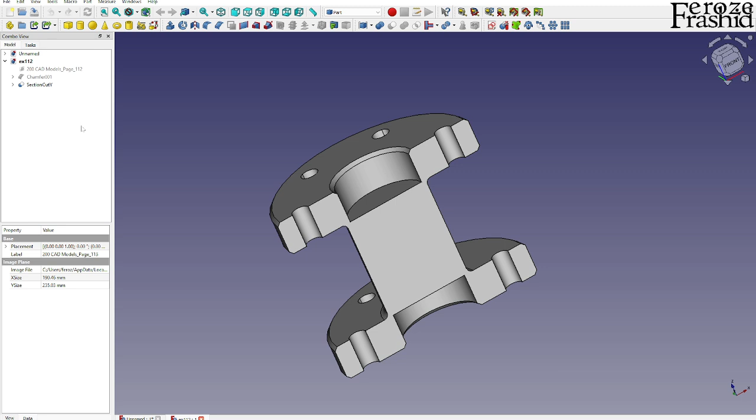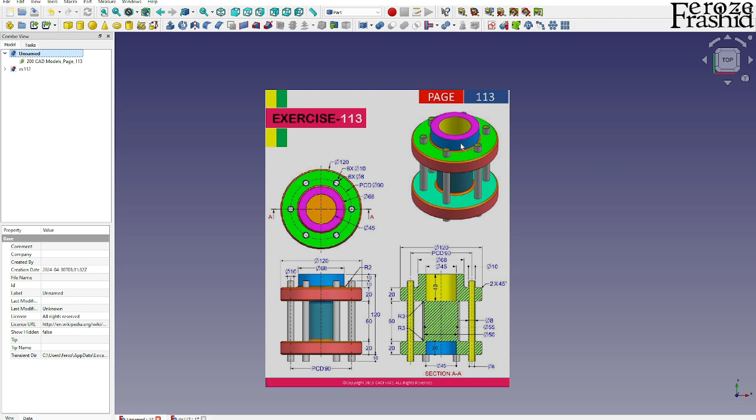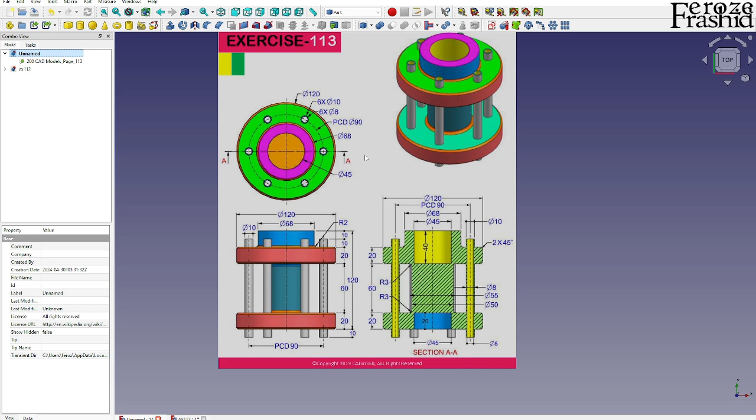113 looks very familiar to me because it's actually an extension of exercise 112. Let's open up 112 real quick. This is exercise 112, and the technical drawing gives us an idea. We have this gap which is 20 millimeter both top and bottom, but on 113 this top gap is more than 20, and the bottom one looks good. So we have this collar extension which is new for this exercise, and then these holes that we created in 112 now have a little tube inside each of those.

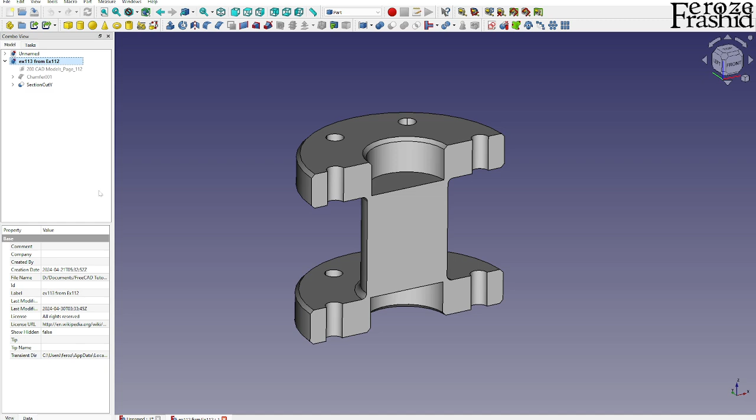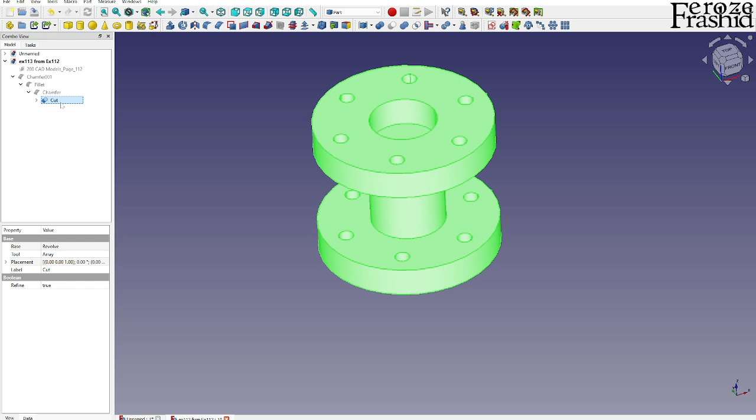I think I can modify the previous one, exercise 112, to develop 113. Should not be a big deal. Before we do that, I'm going to save it as 113. I'm going to go ahead and delete this section cut that I created previously, probably don't need that. We have one fillet, one chamfer, probably because I forgot to do the chamfering altogether. And then there is this cut, which is the same object actually, if we don't look at the chamfering, the beautification.

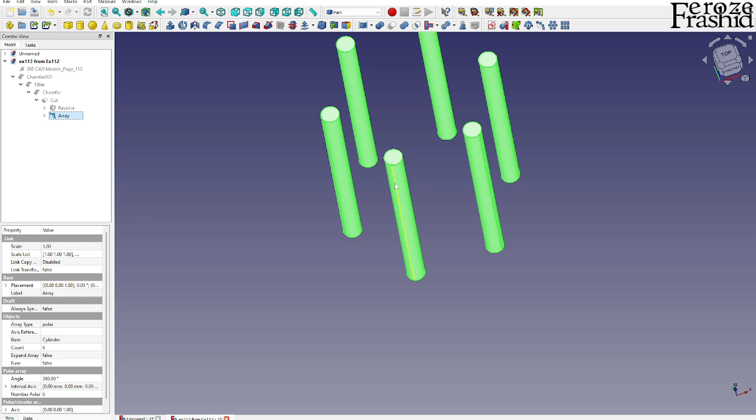Within the cut we have this revolve, and then we have this array, which is the array that we cut through. So we can modify this array to show what we want. There is this cylinder, and we can change it to a tube, which will take care of it beautifully. Or we just keep it as is and add tubes in it. Since we are modifying this, I'll probably add a tube just to keep it undisturbed.

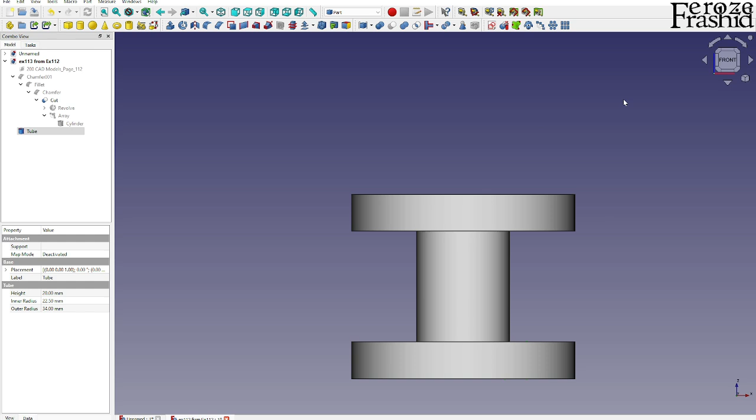So what I want to do is add this collar on top, a 20 millimeter top collar. I'm going to add a cylinder. Outside radius would be 68 divided by 2, and inside would be 45 divided by 2, and height would be 20. We got that tube and want to move it up, so I'll transform it to bring it up here and see where that lands. Okay, so it would be 100. All right, we got that.

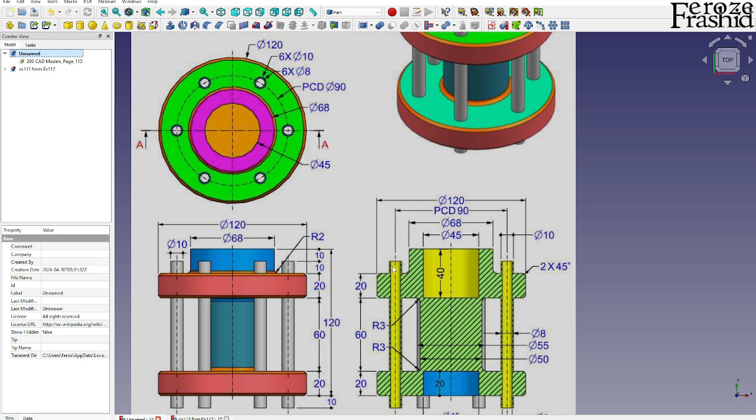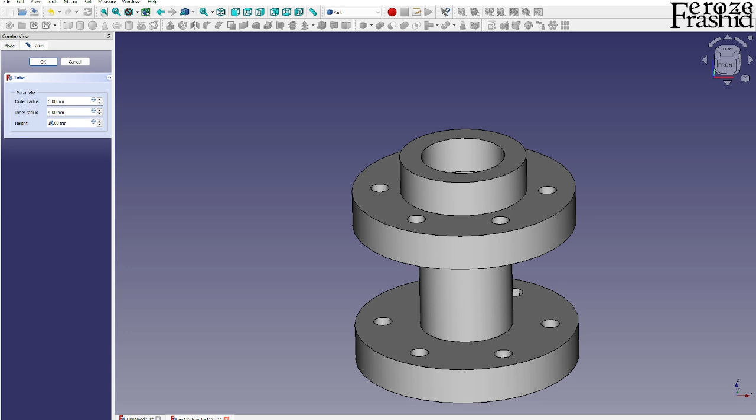Beautiful. Another thing we have to do is add these tubes, at the same diameter where the holes were previously, but the tubes are 10 millimeter outside diameter and 8 millimeter inside diameter. I'm going to add another tube: outside would be 5, inside would be 4, since these are radius not diameter, and height let's make this 110. So this is the tube, these are 6 tubes, and this is that collar.

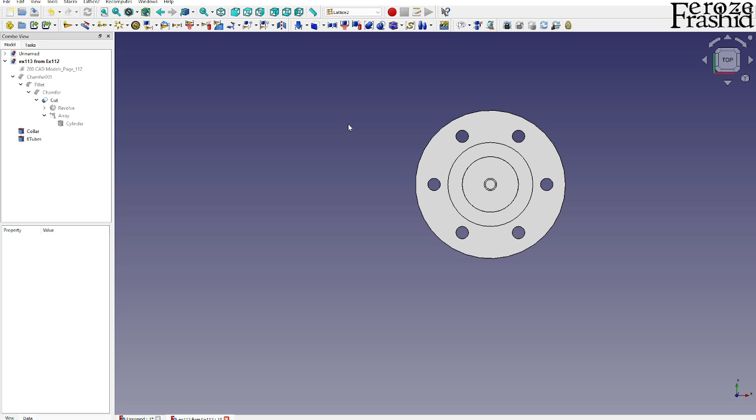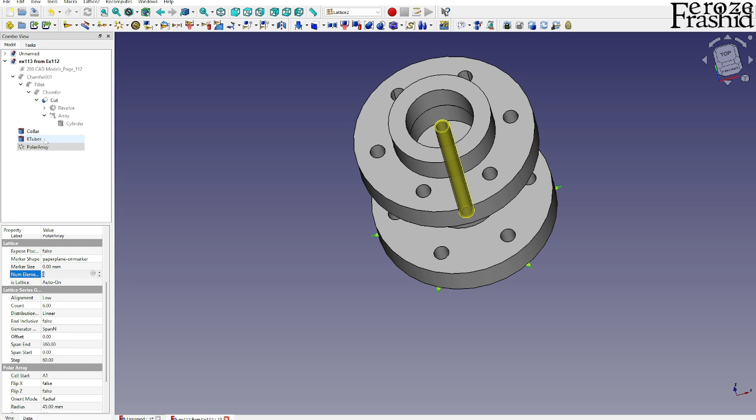Now we'll throw it in these holes, using lattice 2 compared to draft workbench. I had this comparative discussion in the previous model building, so I refer you to that discussion on why I'm doing this in lattice compared to draft workbench. On the polar array, I want count 6, and radius 45. Select these two and create a set of copies, 6 copies to be exact, and there they are. I'm going to hide these two.

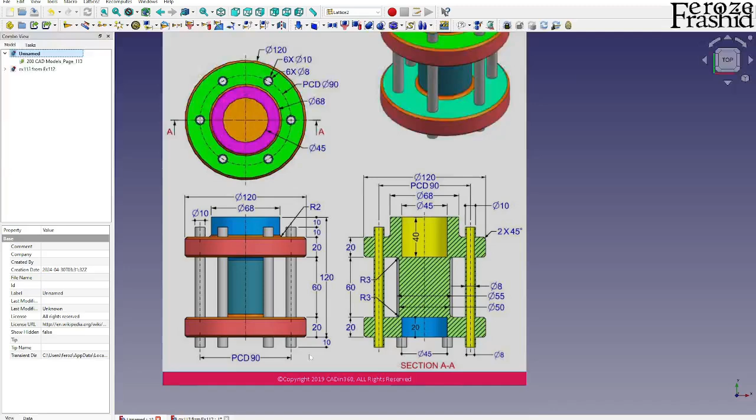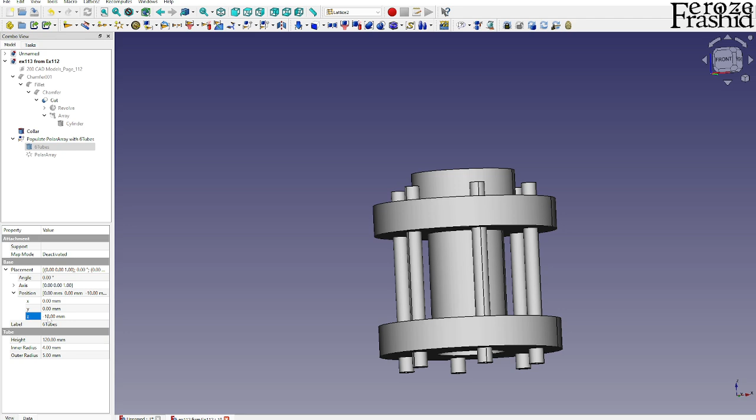Now we have the tubes. Let me make sure we are at the right height. This tube will extend 10 millimeter below and 10 millimeter above what it is now, and I don't think I took care of that. I haven't paid attention to that when creating it. So it will be 100, the total length, plus 10 above, plus 10 below, that would be 120. And the original tube, on the Z axis, it would be minus 10, so it will come back. Now the whole set comes back. I think that's the object we're looking at.

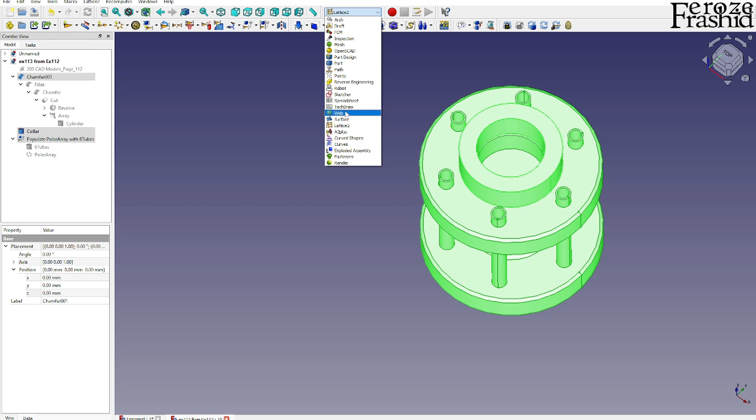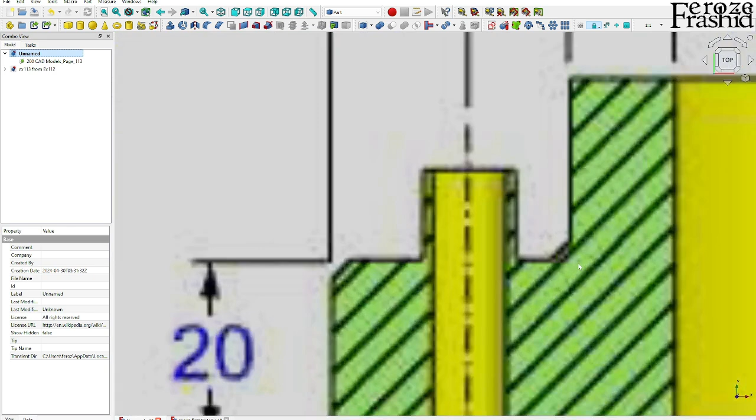I'm going back to the chamfer, which is the final object we had, and then I can take all these three and make a union. Go back to part workbench and make it a union, so that's one whole object. Now I can come back to this line, and I think there's a chamfer around it, 2 millimeter—oh it says radius 2. It does look like a chamfer here, but I'm just going to make it a fillet. We'll make it a fillet of 2 millimeter, and I believe that's our object.

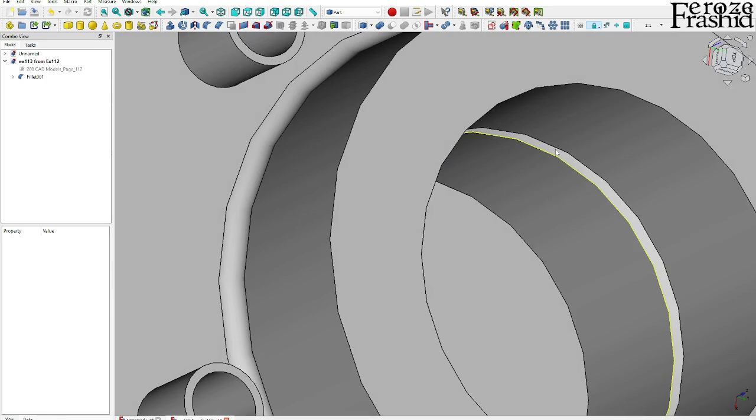Okay, I see two lines here, they're not matching up exactly. It's probably the radius—actually it is lining up. But I don't know why it shows a little gap in there. Anyway, I will not lose any sleep over that one for now.